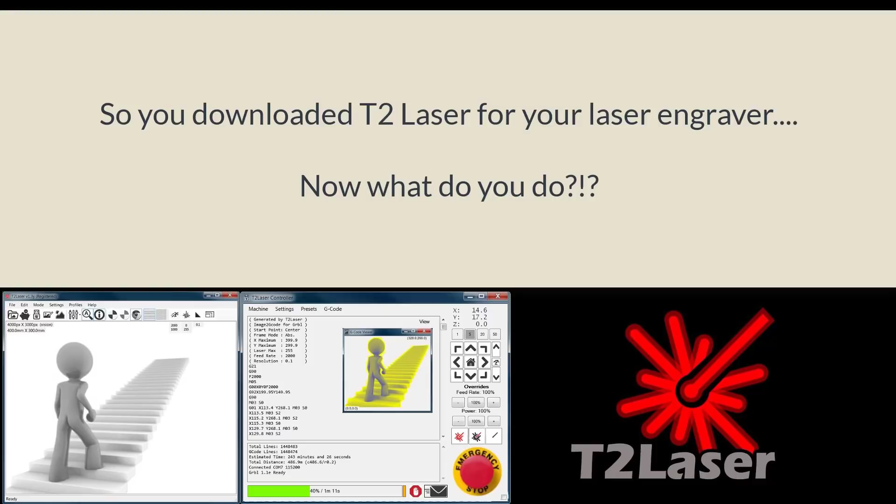Okay, so you've downloaded T2 Laser and unzipped the file, so now you need to install it. So we're going to install this. You've downloaded T2 Laser for your low power laser engraver, something like an Eleksmaker or something you got from Banggood or GearBest, or a laser axe machine.

And now you're switching to T2 Laser. Once you get it installed, it will automatically open up and give you this icon on the desktop here. I like to keep mine out of the way there.

So the very first thing that you need to do is make sure that you've assembled your laser, you've got it all plugged in, the USB is plugged into the Nano, and you have the power turned on to the controller. So the very first thing you do is load up T2 Laser, and we are going to hit the Control Laser button. Okay, and so this is what you're going to get.

You need to go in here and select your COM port that your laser is attached to. I've only ever had one COM port in here; whatever COM port is in there is my laser. If you have multiple ones, you have to select the one appropriate for your laser. The baud rate will automatically select itself and usually be correct there. So then you're going to hit the little lightning bolt to connect to your laser.

And you'll see that I have Grbl 1.1E ready. So we're going to go here, and that's the correct Grbl you want to be using at this time, here in April 2017. 1.1E is the most stable current version we're working with. There is a new 1.1F, and I'll show that to you in just a second, but that just came out in this release, and this release is 1.3C of T2 Laser.

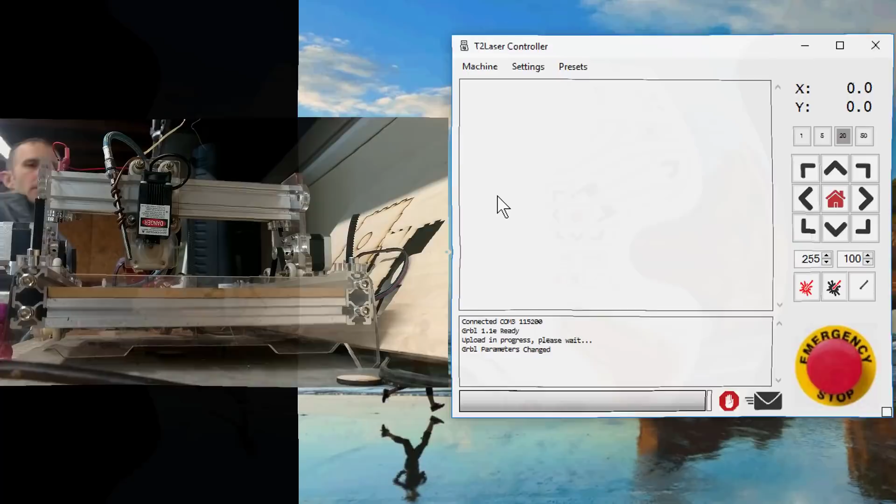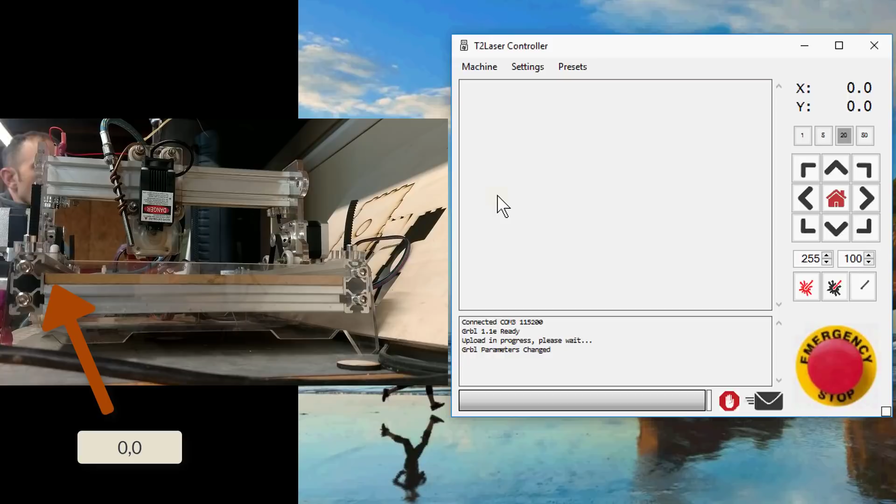All right, so I'm back. The camera is sitting on the opposite side from the control board, where all your wires come into and out of. It's on the opposite side, and so the side opposite to that is where 0,0 is. The bottom left is the opposite left side of the laser engraver. I have mine sitting on the workbench here sideways. However, if it's easier for you to conceptualize, you might want to turn your laser so it's facing you with the controller board on the further side from you - that's standard.

So what we're going to do is jog the laser to the right and to the left, and it went in the directions I expected it to go - right for right, left for left. Then we're going to jog down. Okay, and so it came towards me, away from the camera, and that should have been up, but I pressed down. So this is why we do this.

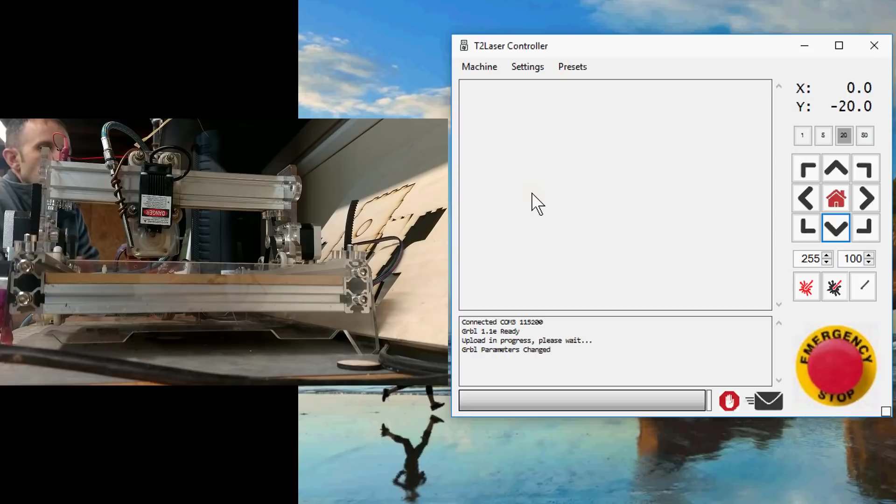So we're going to go in here. The reason mine did that is because I replaced the stepper motor wires, and it reversed the polarity on them. I had to do that because one of my wires broke, and the ones I ordered just happened to have reverse polarity. They work fine, but they are reversed. So I have to reverse the Y-axis. If I don't do this, everything's going to be flipped on the Y-axis and come out all wrong. So now we're going to press down, and it goes down.

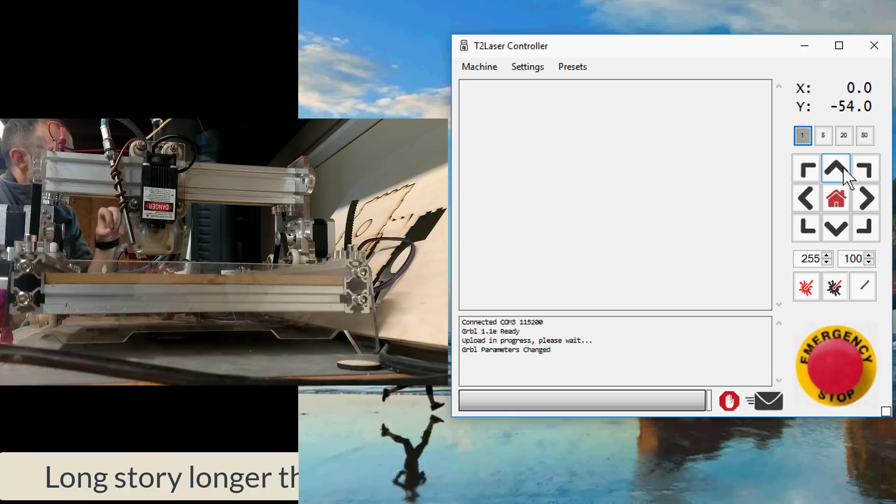So you can see we are stepping at 20 millimeters, so 2 centimeters every time I jog it. You can either jog it 1 millimeter, 5 millimeters, 20 millimeters, or 50 at a time. If you hover over here, it'll tell you jog step distance - that's not actually the steps. There's 80 steps in a millimeter, so when you jog 1, you're actually jogging 80 steps. But if you broke a millimeter down into 80ths, it'd take forever to jog around. So 1 is 1 millimeter, 5 is 5 millimeters, and we can jog around and make sure the laser is working as it should.

Now we need to make sure the laser comes on, so make sure you have something underneath your laser. I have a piece of scrap wood in there with a grid, which I'll show you in a second - that's for lining up my pieces. Under that, I have a piece of metal. You just go get a thin sheet of aluminum that's the length and width of your laser. You don't want to burn into it if you have errors.

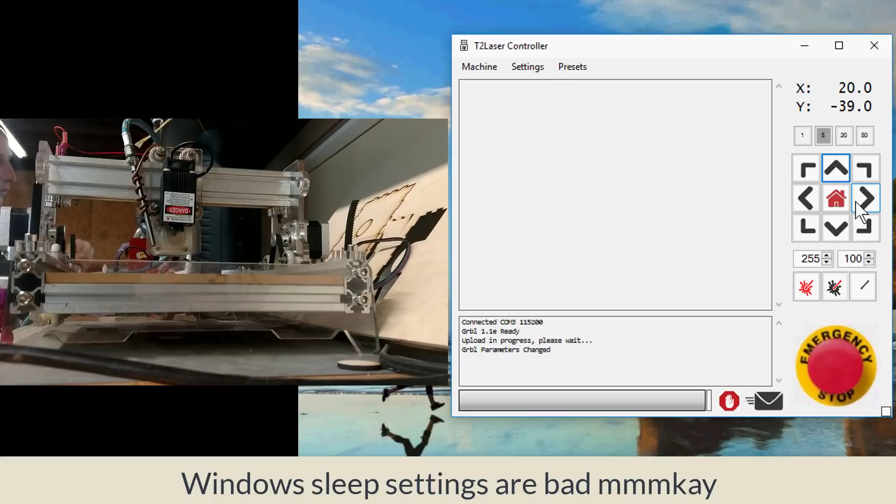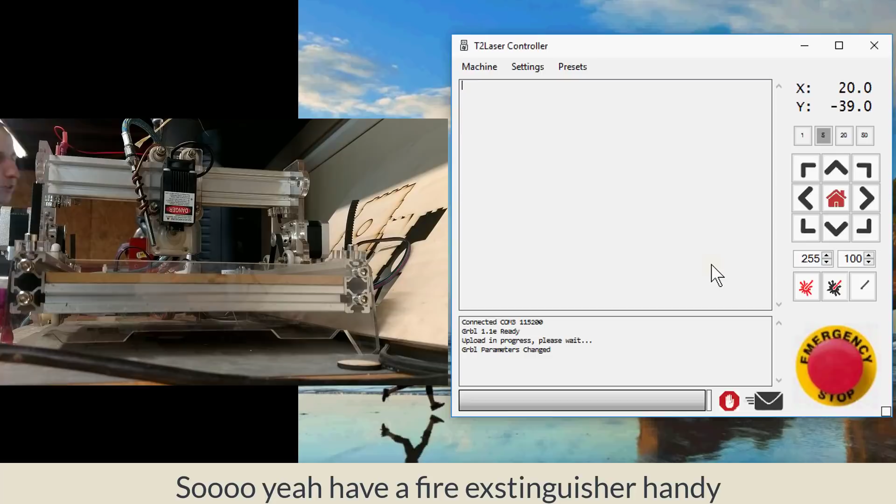One of the biggest things right now, if you're installing T2 laser and you're listening to me, turn off the sleep settings on your computer. Because if your computer tries to go to sleep while you're laser engraving - and it shouldn't, T2 should prevent that from happening, it's down here in advanced, the fail-safe mode - that can happen if your computer tries to go to sleep. It can leave the laser on and stop moving it, and it'll just burn a hole right through whatever you're engraving.

And then if you don't have an air assist going, if you don't have metal going, it's going to catch something on fire and destroy your workbench. I have cut into my workbench by accidentally cutting through something I didn't mean to. So make sure you have a sheet of metal under there, and that'll really save your bacon.

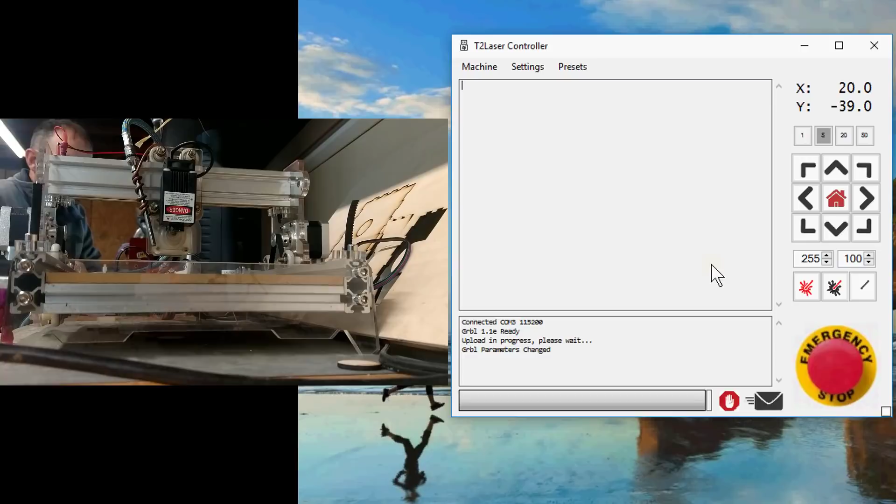Okay, so what we want to do is, this says 255 right here. 255 is max laser power, and that's because it's an 8-bit processor. So if we go to something lower, that'll be something less than full power. And it's not a percentage, because obviously 255 wouldn't be a percentage.

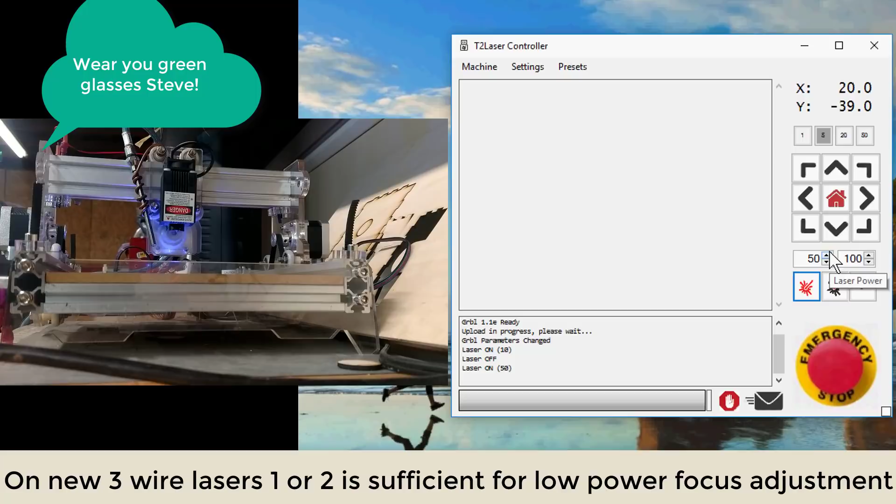But if we go down to, let's say, 10, and we turn the laser on - my laser didn't come on, so I have to go to something higher. So this one's off, this one's on. Let's go up to 50, and we're going to turn it on. There we go, we got the laser on, and it's in low power mode. Make sure that you have your green glasses on. So now the laser came on. That's great, that's perfect. So now we're going to turn the laser off. Turn it on, turn it off. Okay, so the laser comes on and off as we expect it to.

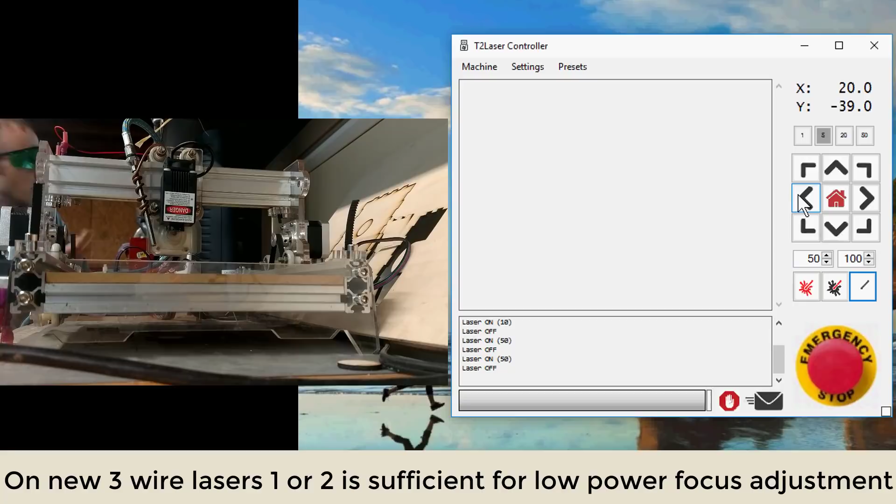If we went up to 255, it'd start burning - it might catch something on fire, so we don't want to do that. We want to set it at a low setting, somewhere between 1 and 50. And depending on the intensity of your laser, yours is probably going to be higher or lower than mine, so that's an individual thing.

Okay, so now we've made sure that our laser turns on and off and it jogs in the right direction, so it's time for a test burn. Let's get out of here, we're going to press X. And we're going to come in here, and the first thing we need to do is go to samples. We're going to select a 50 millimeter circle, and we're going to auto zoom.

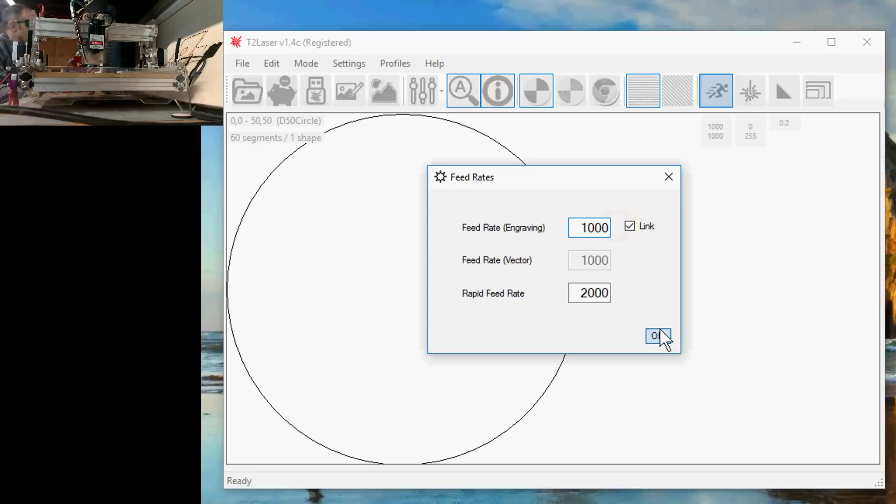Feed rate - if you're cutting, you want it down as low as 100. 3,000 is max on that, you probably don't want to go higher than 2,000, but for this, 1,000 works perfect. This limits the laser on how much power you give it, so we're saying that at minimum you can use 0, and at maximum you can use full power, 255.

This is the resolution, how many scans per millimeter. At 0.1 millimeters, that's 254 dots per inch in Inkscape or Photoshop, which is the highest resolution. Your laser, when perfectly focused, is going to be 0.1 millimeters in width, so there's no sense going lower than 0.1. If you put 0.05, all your laser is doing is going over the area it already covered. 0.2 is for a little faster speed, but for this it doesn't matter, it's just going to draw the line.

The last thing we're going to do is come down to the output size. It's at 50 millimeters, I'm just going to cut this down to 10 millimeters. I don't need such a big circle, it's just a test circle.

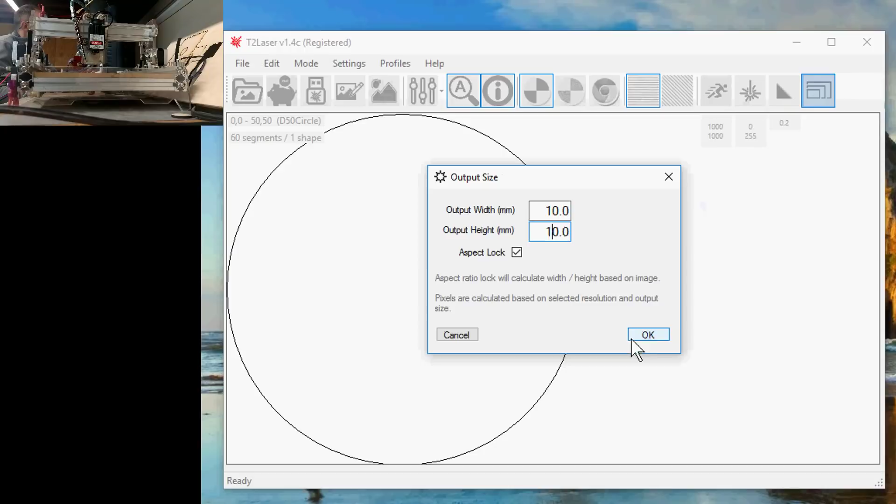Then we're going to go in here to settings. By default, it starts at the lower left corner, meaning the laser is going to start here, move here, and then start drawing the shape. So we need to define this point. Obviously you could do other settings - upper right, lower right, center start point - but for this, lower left is going to work perfect.

So we're going to generate the G code. You probably have the trial version since you just downloaded it, and that's all you need at this point. Until you verify that all of this stuff works, don't spend your money on this. Zacks, the guy who designed it, will say the exact same thing - the trial is so you can determine whether it works with your system, and it should. But make sure it works before you waste a cent on something that's not going to work for you. He doesn't want that, and it's no good for him or anybody else.

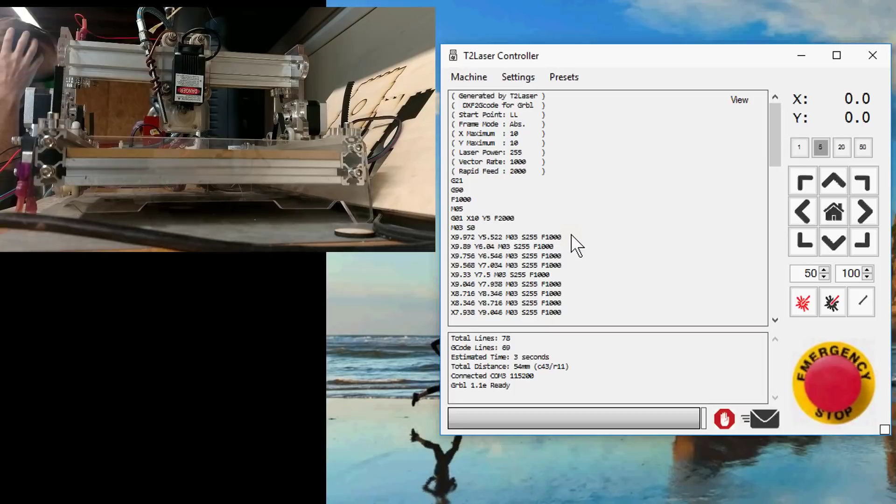With the trial, you get 30 minutes of run time and 10,000 lines of code. The reason I bring that up is the circle we just created is 69 lines of code, so that's not very much. You have up to 10,000 lines of code, and I'll do another engraving in a second to show you an idea of how big something you could do, though each project varies. This circle is only 69 lines and will take 3 seconds to burn. Again, you have 30 minutes and 10,000 lines of code you can generate, and when that expires, you can close the program, open it back up, and your 30 minutes and 10,000 lines start over again.

So if you want to work on bigger projects, you're going to have to buy the registration. But if you're just working with smaller projects and getting into this, just work with the trial version until you got it all sorted out and think you're going to be happy with the software.

Now we need to define where the lower left corner is. We can either turn on the low power button, which is on the controller for me - it may be on your laser, or you might not have one at all. If you don't have one, we're going to turn this down to 50 and turn the laser on. That's going to show us where our laser's at, and we need to focus that. Let me grab the camera and show you what we're looking at here.

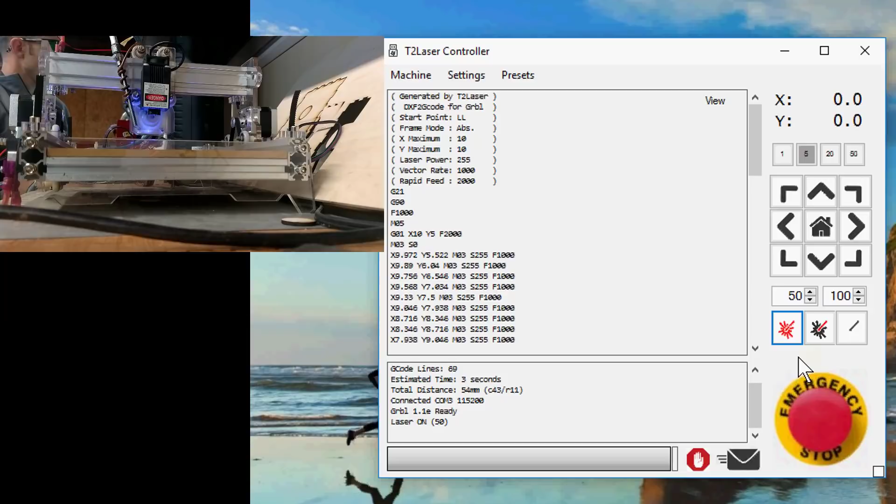See there, it's a nice big circle. If we bring it in, we want it down to a pinpoint. That looks pretty good - for what we're doing here, that's going to be good enough.

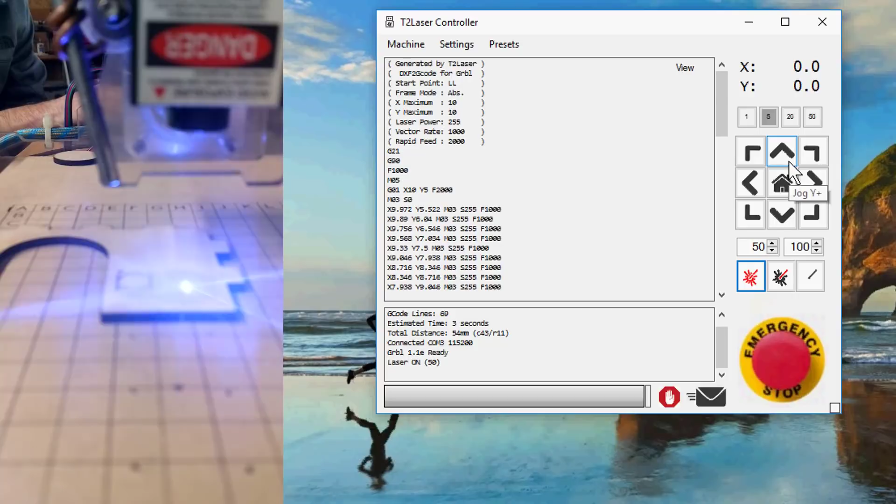Alright, so now we need to tell it where the lower left is. I'm going to put it just over that other circle. We're going to jog up 5, 10, jog over maybe 15, turn the laser back on. Oh, just about right, go up a little bit. Now you can see the X is -20, the Y is 15. If I hit send the G code right now, it'll go back to 0,0 and start drawing - that is not what I want. I want it to start drawing right where it's at. To do that, you're either going to click or right-click the home machine.

Right-click the little house button, or go in here and set the origin of your workpiece. Now you see that it says 0, 0, so it thinks that the lower left is right where it's at right now. If you forgot what you picked, lower left or lower right, click view and it's going to show it right here. The big orange dot is where it's going to start out. That's where the origin is, that's where 0, 0 is.

If you hit upper left, the orange dot would be over here. If you had middle, the orange dot would be here. Hit S for simulate, and it's going to show you what the laser is going to do. It's just going to draw the circle.

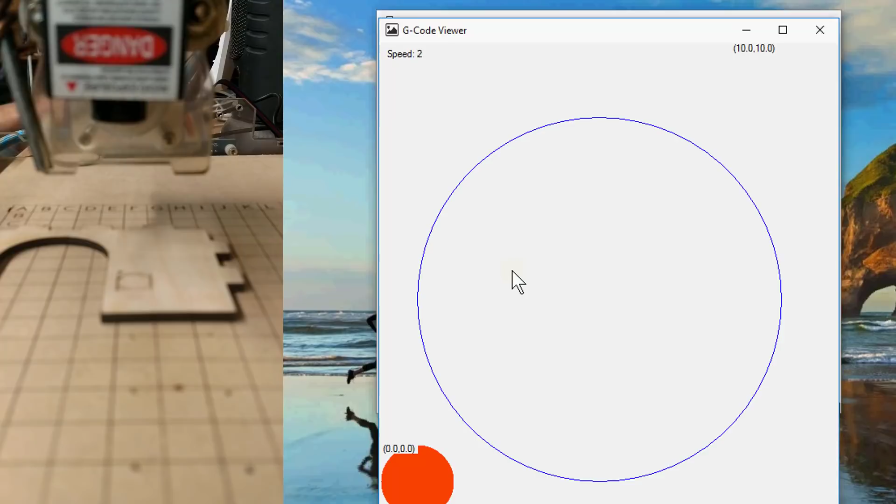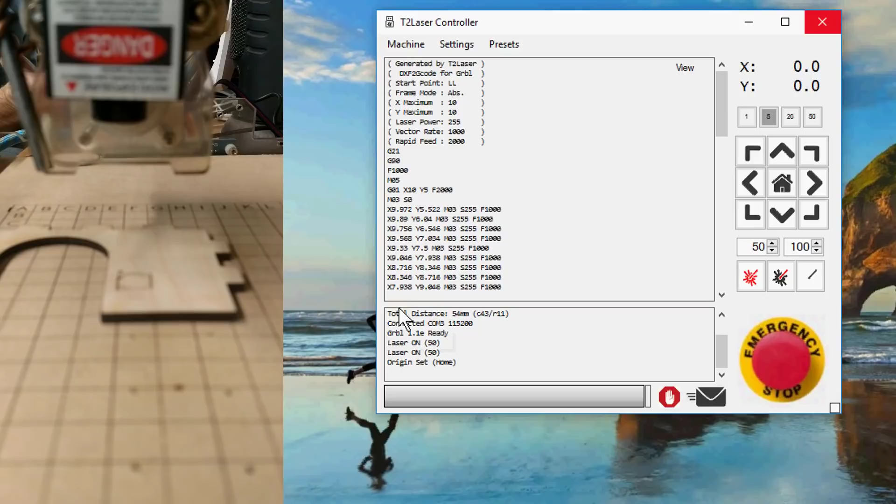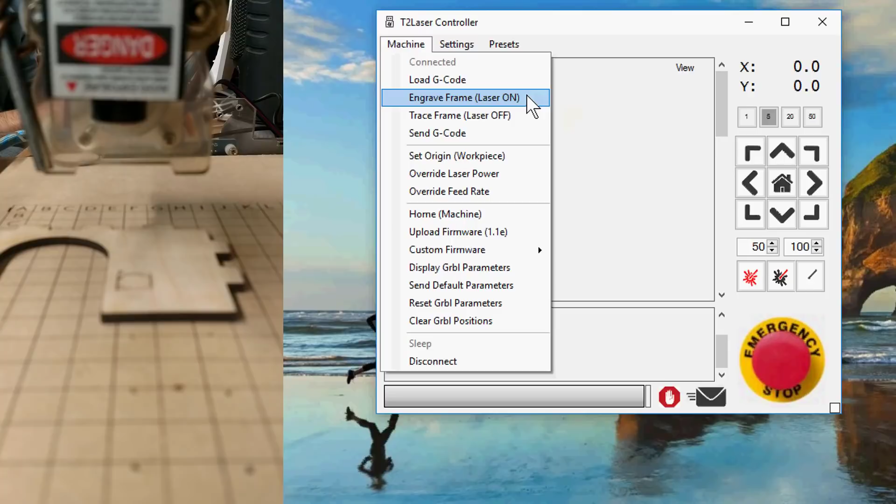So one last thing we want to do is have the laser in low power mode draw the extents of where we're going to be drawing, to make sure this is going to be drawn on the piece of wood and not on our grid or a scrap piece, or try to draw off the page. We do that by going into machine and put engrave frame laser on. You must have this setting turned down from 255, otherwise it's going to burn the frame, and we don't want to burn the frame. We just want an idea in low power mode of where this circle is going to be drawn. So engrave laser at 50, yes, up, down, there, okay, perfect.

So that happens to fall within the area we're looking at. That's going to fall on our workpiece, so we're ready to send this.

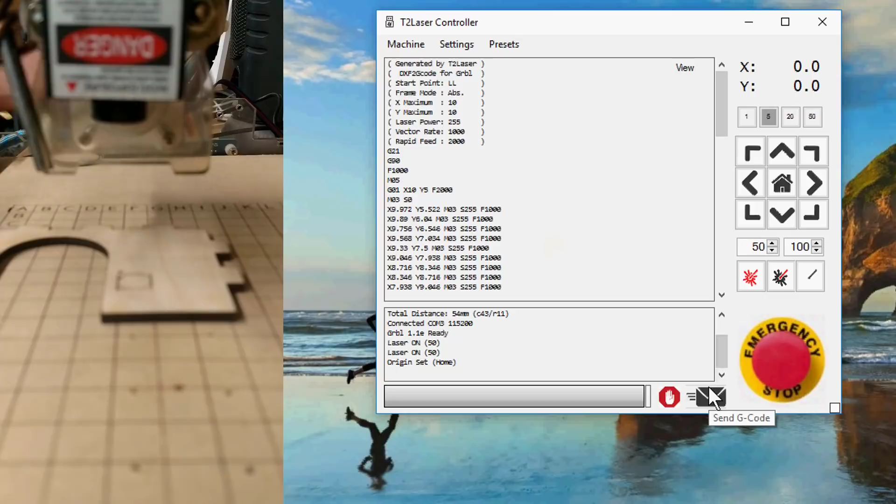All right, so send the G-code. And there we go, we have our circle. So that worked out great.

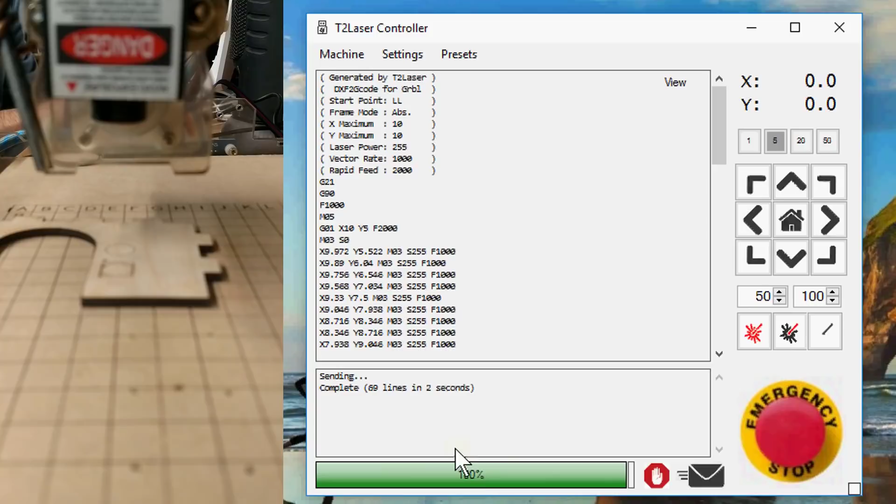All right, so now we have our circle, and that was 69 lines, and it took us 2 seconds. So one other thing we want to turn on here: if we go down to advanced, estimated time remaining. This will tell us, when we send it, how much time is remaining on this green bar until the project's done.

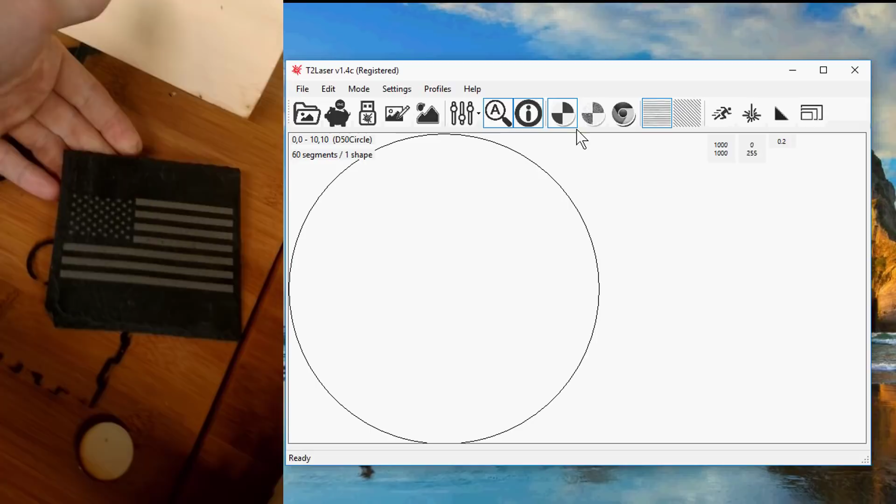So we are going to do one last thing here. I'm just going to show you how I would go about burning a project. If we wanted to make this coaster, what we would do is come in here to T2 laser, we'd open the— I clicked the wrong button, I think.

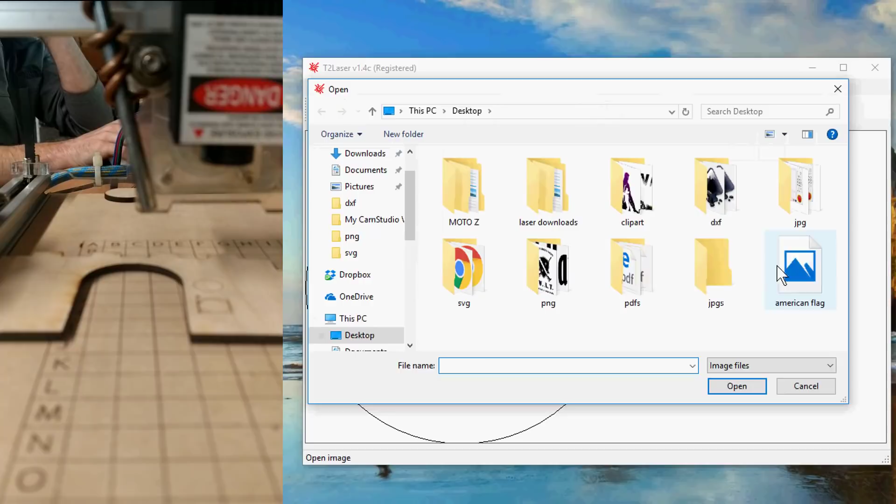Open image, and we're going to select our American flag. Everything that's black is going to be engraved, everything that's white is not going to be engraved. We're going to start from left to right, and so you can see you have either black and white. Dithered is just going to be a bunch of dots.

Since this is only a black and white image, it doesn't really show too much what would happen in grayscale, because it's a black and white image, but this is made up of a bunch of dots is what this is. And then we have grayscale mode.

For this, we're going to select black and white. We want to do a horizontal engraving. Horizontal engraving means it's going to draw this line, then go down 0.2 millimeters, draw the next line, then 0.2 millimeters, 0.2 millimeters, until it gets all the way down here and has drawn all of these lines.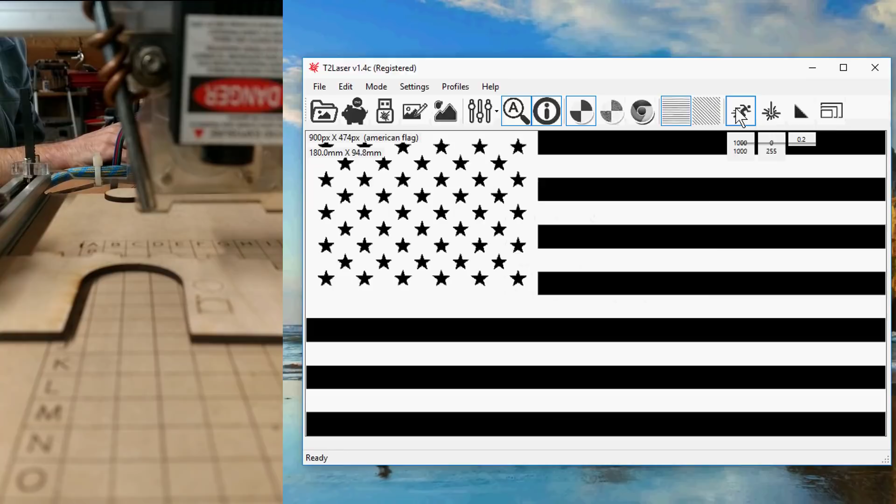So we're going to burn this at 1,000 millimeters per minute. Power, full power. Resolution 0.2.

Normally I burn this and it's 90 millimeters wide. However, because it was a 0.2 resolution when I brought it in, it's at 180 millimeters, so that's double the size that I normally do it at. So I don't want to do that.

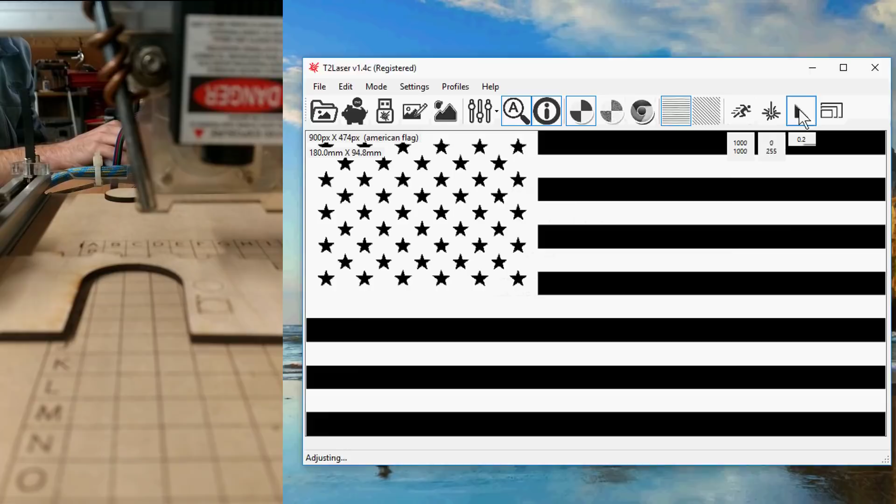So let's go in and change the resolution to 0.1, which is what I normally use. We're going to reopen the image. All right, now let's take a look at the resolution. So our output width is going to be 90 millimeters now by 47.4 millimeters.

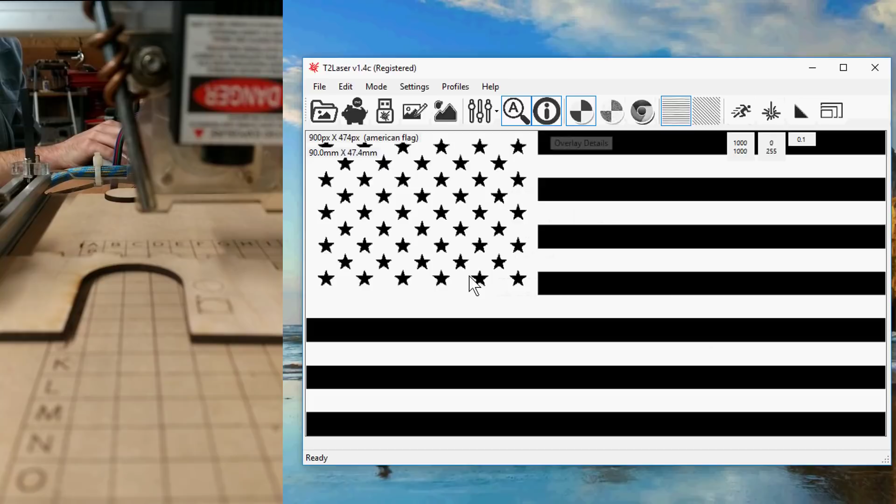All right, so we're all set up. We're using a corner start point, lower left. We're going to generate the G-code. So this takes a second. I just did this a few minutes ago, and I expect it's somewhere in the 6,000 to 7,000 lines of G-code area. It should be somewhere in there.

Oh, I said that I wanted to save the G-code. I didn't want to save the G-code. You don't need to save the G-code. Anyway, so again, yes, 6,426 lines of G-code. So that is for the slate coaster.

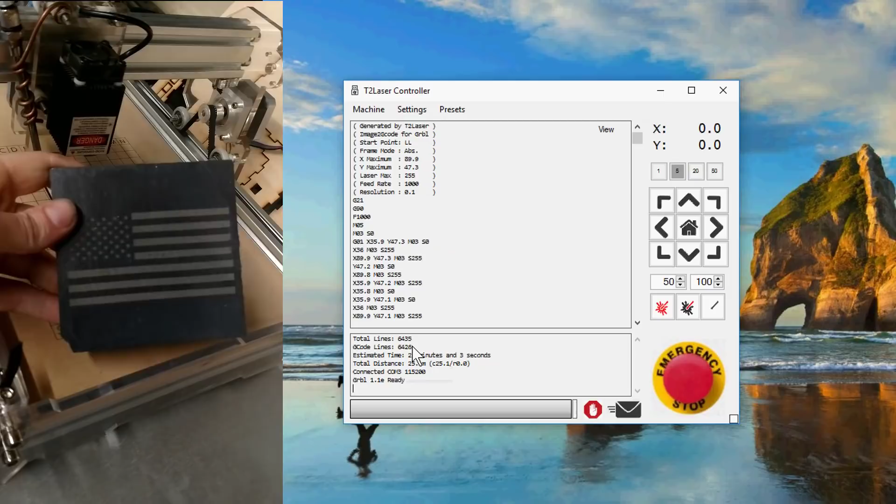The slate coaster is 100 millimeters by 100 millimeters, and we're engraving 90 by 47 of it. So that would take approximately 25 minutes.

And it would use 6,426 lines. So if you just open up T2 Laser, you'd have basically 5 minutes to get this all set up and burn that, and it would be within your 10,000 G-code line limit and within your 30-minute limit. So that's kind of an idea of how big and how fast is something you could engrave with just the trial version.

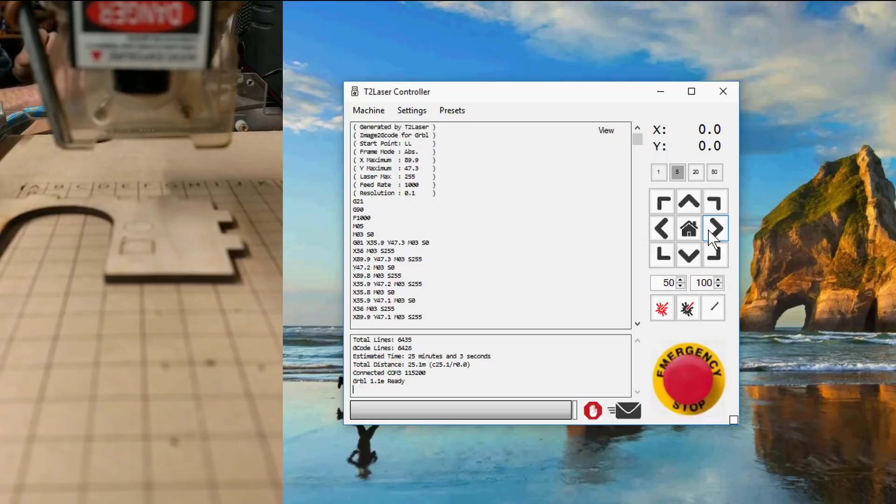If you have any problems other than it not jogging left and right the directions you wanted it to, if it just doesn't jog at all, let's talk about that. A couple things can go wrong why your motors aren't moving at all. It could be because your power button is turned off, and your board might look a little different than mine. If you have one of the new Mana SE boards, it's not going to have that second button on there.

That's the low power laser button, just for focusing the laser. The first button, you turn it on, you get that red light on the board, that means it's on. So if when you try to jog the buttons and nothing happens, it could be that the power is turned off there.

The other issue you might have is that your stepper driver has improper voltage. Right here is a little Phillips head screwdriver deal, and if you take a multimeter and go from this post to that little screw, you can get a voltage, and then you can adjust it by turning the little Phillips screw for more or less voltage. Also, if for some reason your circle isn't lining up, it's not going all the way around back to the same spot, either your belts are too loose, too tight, or your stepper driver voltage is wrong.

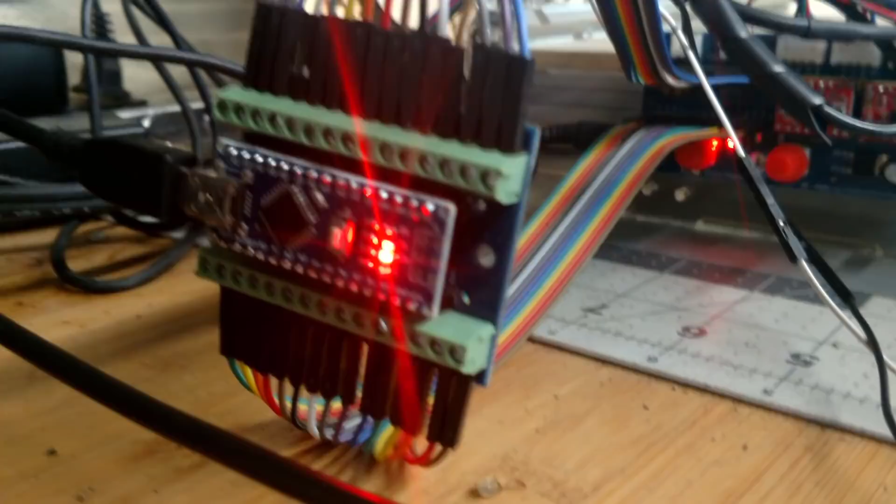If you're not getting control of the laser power by adjusting where it says 255, near the jog buttons, and you have one of these older boards, you need to go in between the nano there, there's a little jumper, and you need to move that jumper, and the directions for that are in Zax's software. Mine looks a little different here because I actually have my nano pulled out into a little shield, and that's because I have home switches set up.

You don't need those to work. Those are just if you're doing repeat projects. It's a little beneficial. But yeah, so this little guy where the USB plugs in, he's called a nano. So if you hear people talking about a nano, that's what they're talking about, this little guy here. He can be ripped off by just pulling him off the board, but you want to disconnect him first and have no power going to him.

So this setup should work for any of you guys, the EleksMakers, LaserAxes, or any of the clones of those systems. If you're trying to set up for one of the new EleksMaker machines, the Eleksegg, the Eleksmill, Eleksdraw, those configuration settings are down here in settings.

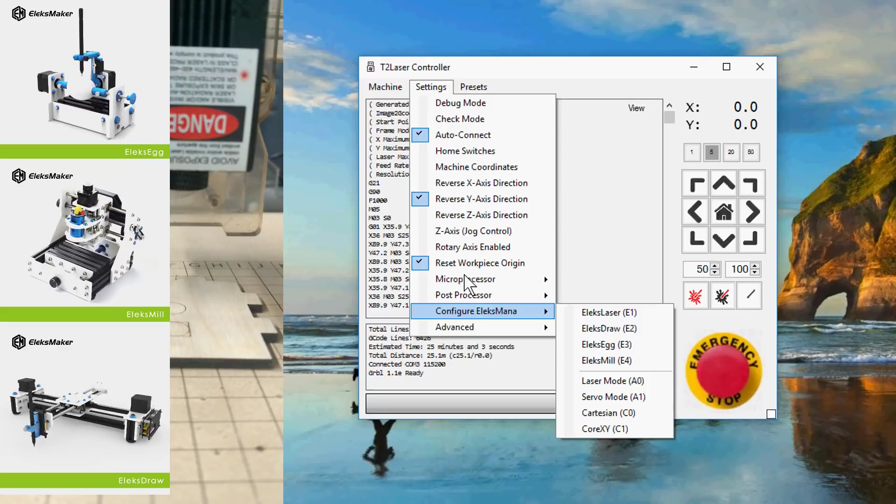You don't need to select the EleksLaser one if you're using an EleksLaser, unless you're switching back and forth. It will automatically set it up in laser mode because this is T2 Laser, unless you select one of these. Like if you're using an Eleksegg and then you're going back to an EleksLaser, then you need to come in here and select this.

Also, there are a couple other firmwares in here. 1.1e is the one you should be using. However, there's the old one, which is 0.9, which doesn't allow you to adjust power on the fly, and there are some other things that aren't in there.

And then 1.1f is the new one, and I'm going to tell you right now not to use it at this point, just because I don't know what it does, what benefits it has, because it just came out for us to use with T2 Laser this morning. So I may be telling you a little different here in a week or two once I've had a chance to try it out.

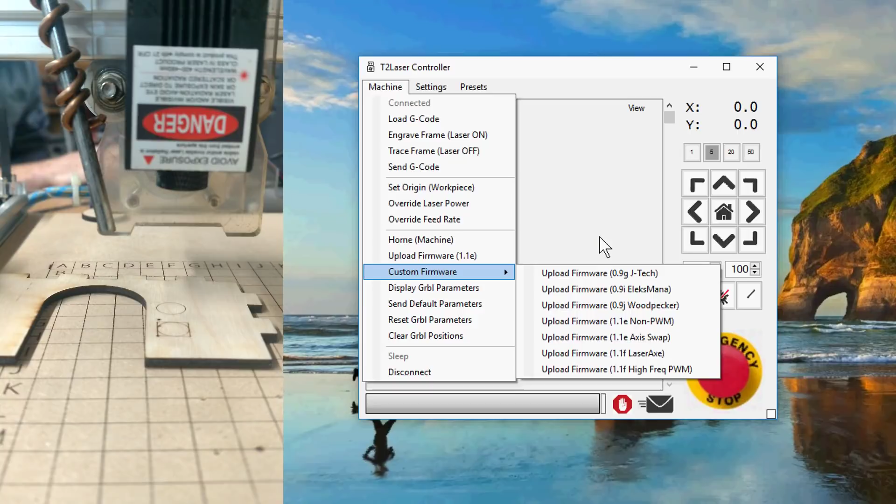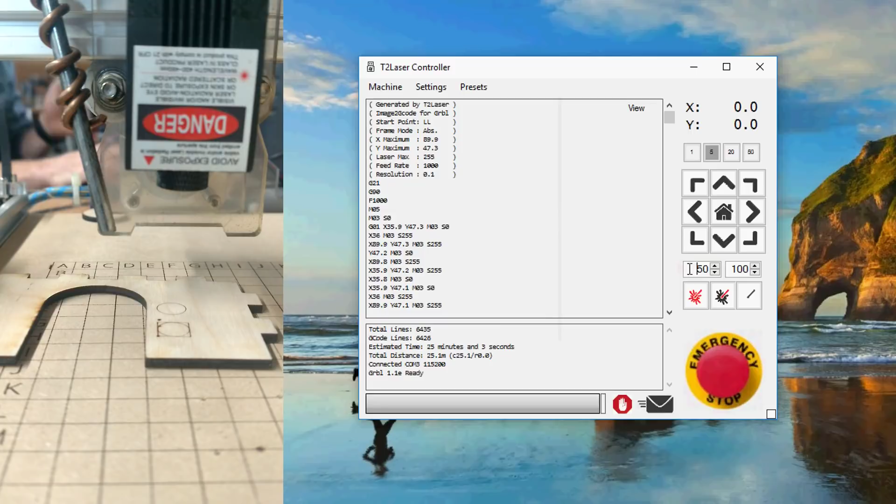Get it up and running, install T2 Laser, upload your firmware, reset your default parameters, make sure your X and Y's go in the right direction, make sure your laser turns on and that you can adjust the power up and down using this little window here and turning the laser on and off. And then make sure that you run a test circle and that the ends of the circles line up, and that the circle is the size that you expect it to be.

And then you're ready to go. You can start loading up all sorts of images and burning those and testing those. So that's all I have for you guys today, and happy lasing.